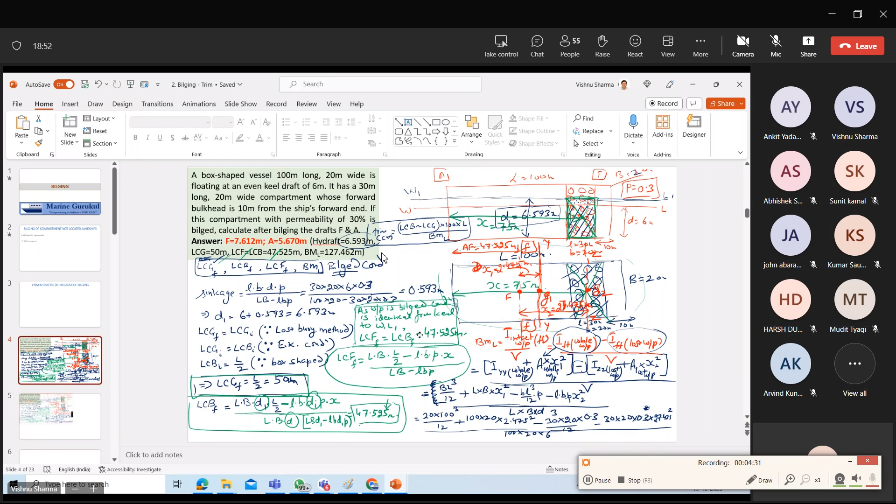It's running slow, so sluggish today. It's sluggish because I need to close this PPT, is it? Yeah, now it's come to me.

Okay guys, now yesterday we closed out on calculation of GM, that means the effect of bilging on the static stability of the vessel, that is the GM of the ship. Today we'll study how does it affect the trim and how do we calculate the drafts if required forward and aft.

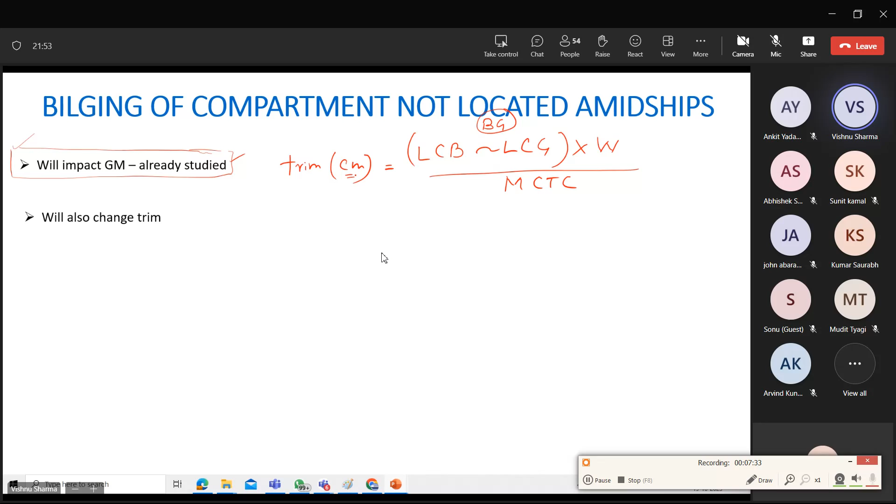We will simplify this formula so that we don't waste time in calculating MCTC. So let's have a look at the formula for MCTC. MCTC formula is W into GM longitudinal, GML, upon 100L. Okay.

Now, if we put the value of MCTC in this formula, it becomes then LCB difference LCG into W, and I put the formula for MCTC here, W into GML into 100L. What happens is W gets cancelled out and my trim in centimeters gets simplified to LCB difference LCG multiplied by 100 multiplied by the length of the vessel divided by GML.

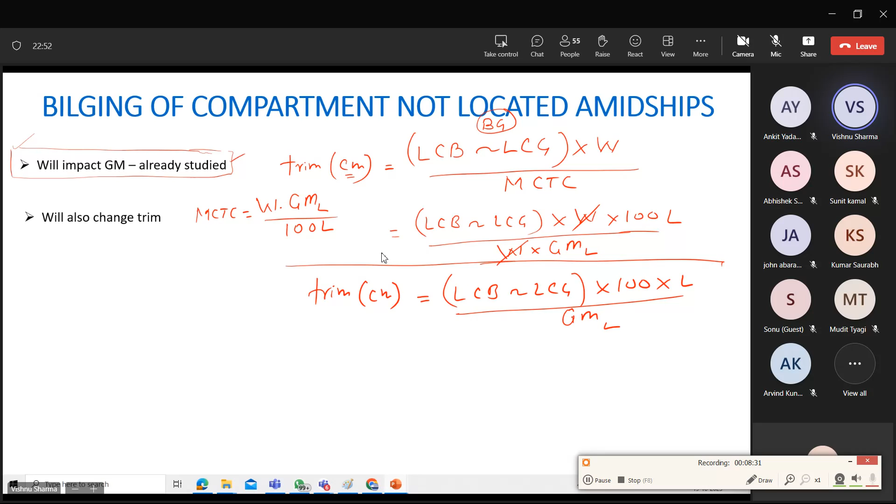This formula is same, only thing is it saves us few steps. We don't have to unnecessarily worry about the displacement, we don't have to worry about calculating MCTC. So we can cut short and use this formula. Do you agree with this formula on display, guys?

Trim in centimeters is equal to LCB minus LCG, multiplied by 100, multiplied by L, divided by GML. This is the formula we shall be using. Now, what is GML going to be equal to? GML will be equal to KML minus KG. There is no question of FSC in the longitudinal direction.

FSC is for the transverse direction, right? What is KML equal to? We already know GML equals KB plus BML, minus KG. That means what I must know to get GML is KG.

Now, if the question gives you the KG of the vessel, then yes, GML has to be used and should be used undoubtedly, because this is the correct formula. But again, many a times in our question, the KG is not given.

So if you see the GML formula here, to BML you are adding KB and subtracting KG. Usually for a normal ship-shaped vessel, BML is quite large, about 125 to 140% of the length of the vessel. So for a 100 meter long ship, the BML can be to the tune of 120, 130, 140 meters. Unlike BMT, which is usually 7, 8, 9, 10 meters. Compared to that, BML is relatively large.

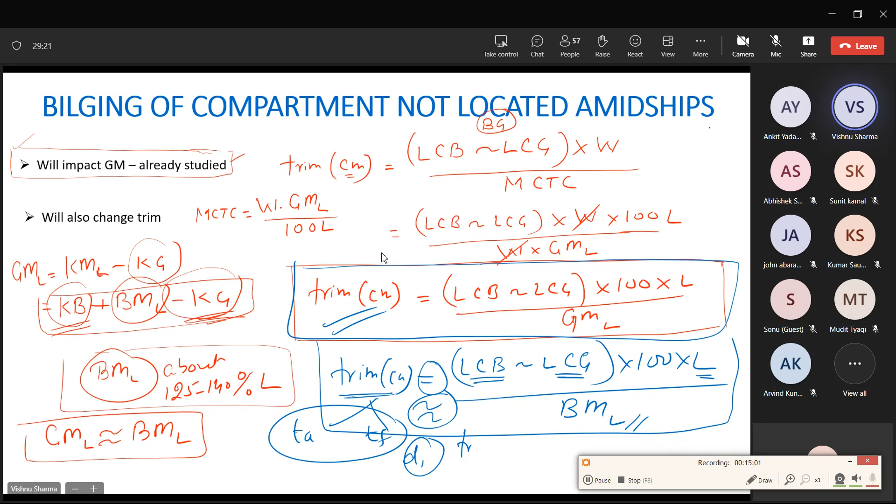So to summarize, for solving these questions, I need D1, I need LCB in the bilge condition, I need LCG in the bilge condition, I need BML in the bilge condition, and I need LCF in the bilge condition. If I can get these 5 things, I'm done with the question. Then there is nothing left to be attended to.

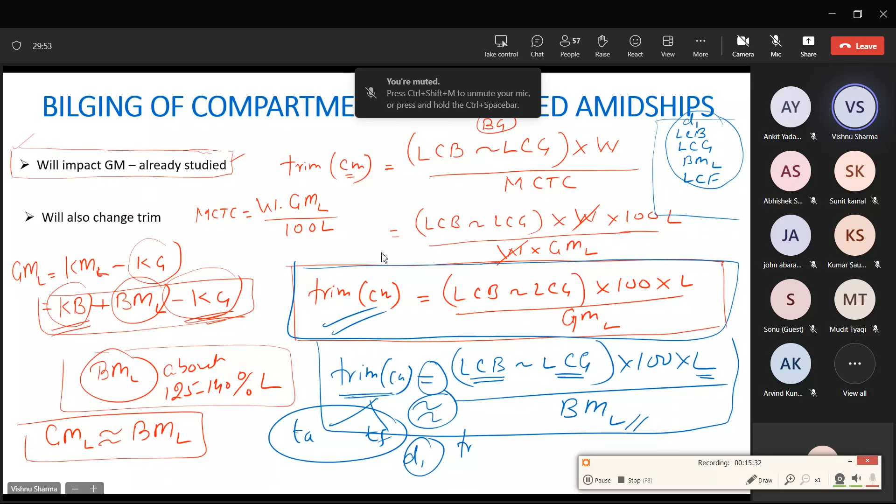So in the question that follows, our focus shall be on these 5 things. How do we calculate them? I list them here for your information once again.

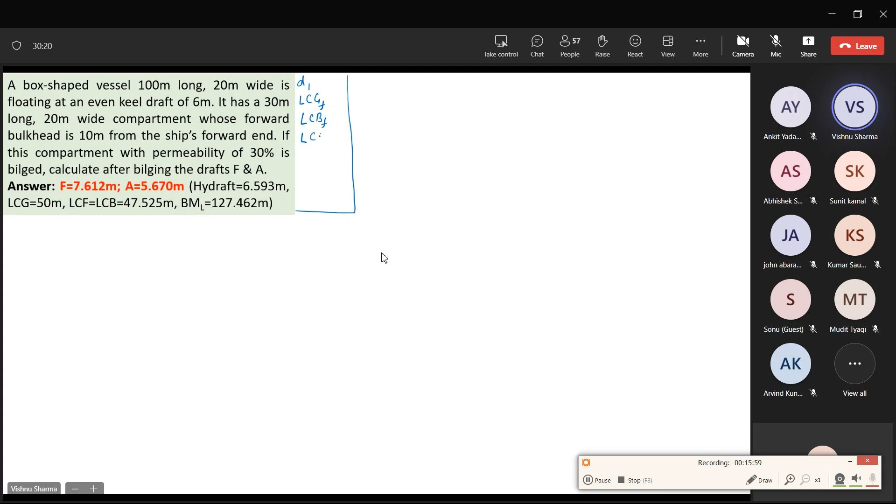We said we will have to calculate, after bilging, D1. We'll have to calculate LCG final. We'll have to calculate LCB final. We'll have to calculate LCF final. And once center of flotation is found, we can find the BML after bilging. These are all post-bilging values.

And once they are found post-bilging, I can close out the question without any problem. Do you agree, guys? Yes, sir. Okay, so what do I do?

First, I make the diagram, which we have mastered over the last 2 days. The length of the vessel is 100 meters, our standard ship. Breadth is 20 meters. Floating on an even keel draft of 6 meters, WL 6 meters.

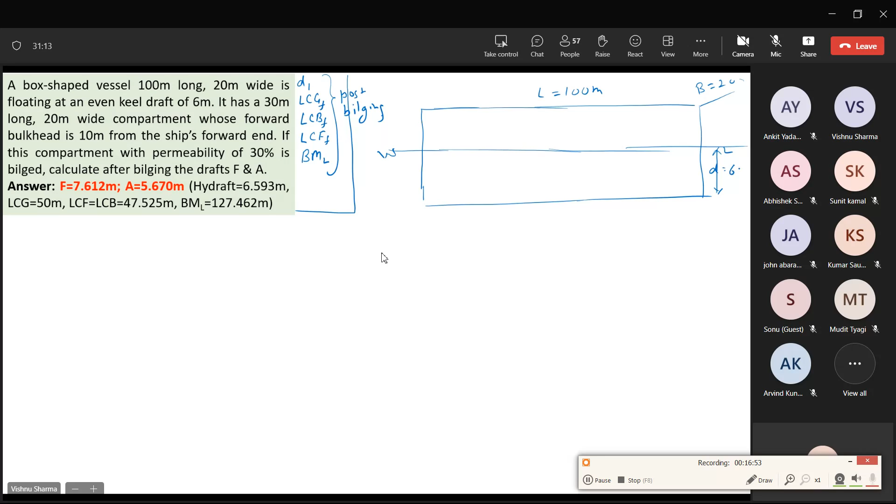It has a 30-meter long, 20-meter wide compartment whose forward bulkhead is 10 meters from the ship's forward end. So let's say this is the ship's forward end, this is the after end. The compartment's forward bulkhead is here, at 10 meters from the forward end. The length of the compartment is 30 meters, breadth of the compartment is 20 meters. It does not have any double bottom.

It has cargo of permeability 30%. KG of the vessel is not given in the question. You can see the question again. He wants us to find out the drafts forward and aft after bilging.

Guys, first please see, is this diagram in the side elevation made as per the question, yes or no? Yes. Okay, only thing is this compartment used to be midship. It has been now taken to the location given in the question. When this compartment gets bilged, I shade the lost buoyancy.

The lost buoyancy is up to draft D. This will cause the vessel to sink. I agree the final water line will be, vessel is trimmed, but we are drawing a water line like yesterday for an even keel condition. That means for D1, W1, L1. And obviously then this draft, wherever I find space, I have marked it. So not necessarily that it has to be marked here.

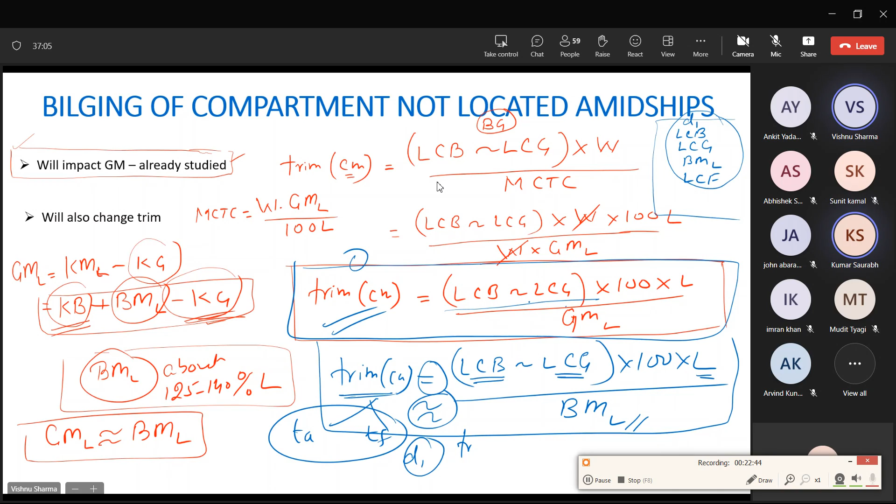You can go back to this formula also. If trim I put 0, then what happens? LCB difference LCG becomes 0. That means they are equal. Yes or no? Okay, but we don't have to waste time.

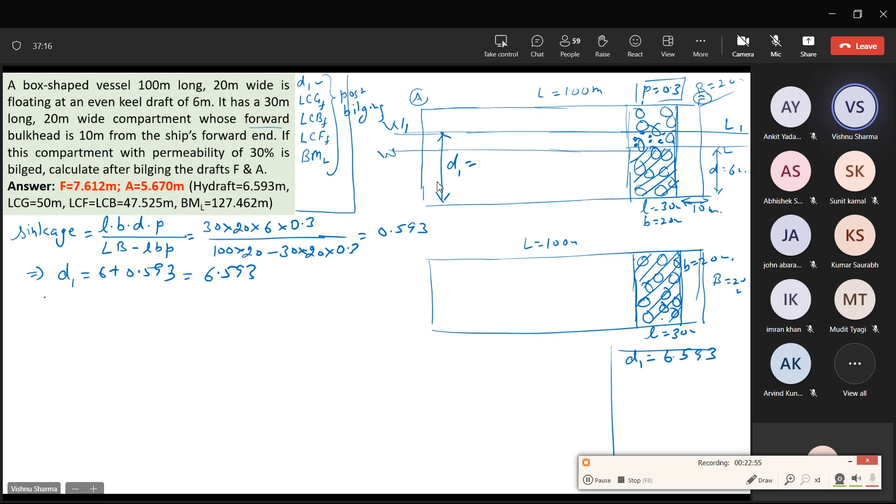In such a case, we can just put it like this. LCG initial, or let me just put it like this. Guys, what will be the relationship between LCG final and LCG initial, and why?

What we are solving, what will they be? Will LCG final be more? LCG final will be more because the weight is increased forward. Which method are you using? Lost buoyancy, it will remain same.

Are we using added weight method? No, sir. So then the G did not shift. If G does not shift, why will LCG change? LCG would not change, correct? Yes, sir. So LCG final will be LCG initial.

I am giving the reason here in my working: lost buoyancy method. Correct? LCG initial is equal to LCB initial. Why? Because vessel is on even keel.

I'm sure you agree with that also. And for this box-shaped vessel, what will be the LCB initial? Tell me, guys. Look at the initial condition, intact condition, what will be LCB? 50 meters, L by 2. Why? Because it's box shaped.

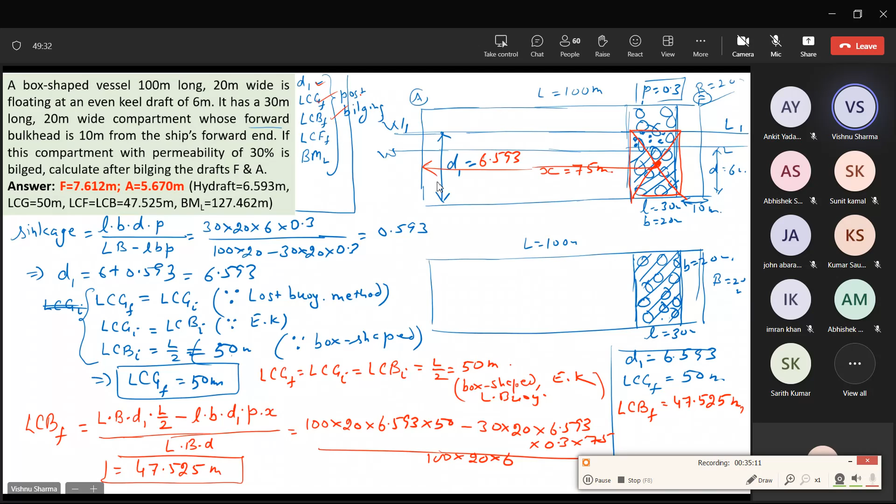Now, out of 5, 3 things are obtained: D1, LCG, and LCB, all in the final condition. All happy up to this point, guys?

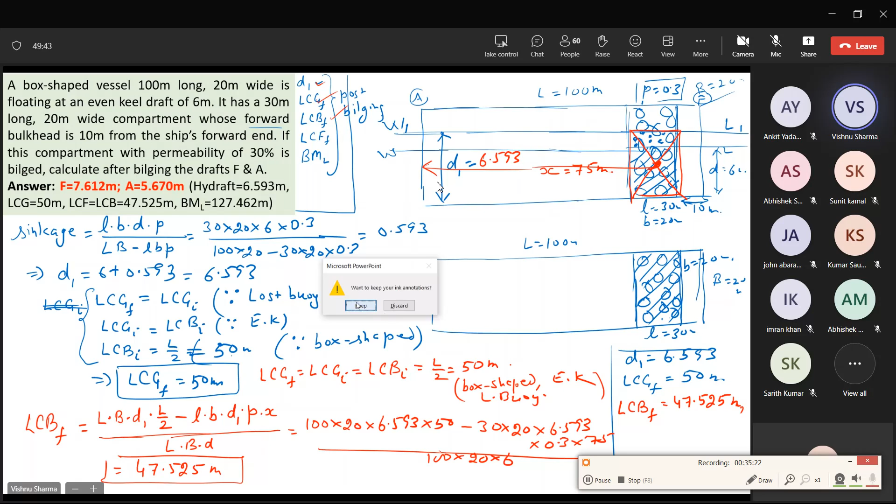Sir, yes. Okay, let me just go to the next sheet then. Here is the working so that you can correlate to the working on the screen itself rather than going left. Here are things.

Okay, now next is LCF. What is center of flotation? I told you earlier also, probably you will remember. It's the centroid of intact water plane. Am I right, guys? Yes or no? Yes, sir.

Now, in many questions like this one, your LCF final will come same as LCB final. But again, it is not universally going to be so. And hence, in some cases, you can get away by calculating either LCF or LCB and using the other as the same. In other cases, you may have to calculate both of them. So what we'll do is, though they are going to be same, I will still learn to calculate, like we did for KB also. In the first example, KB was D1 by 2, but we still learned how to calculate the KB.

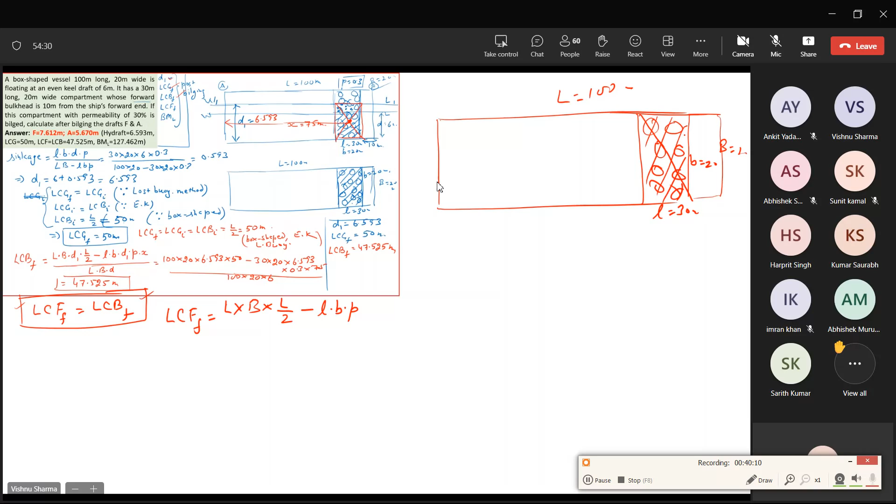Correct? And where will be the geometric center of this one? Here. And what is this, we have already marked? We have marked this as X. Yes or no? Yes, sir. This center will be here. This is 75. Yes or no? So this will be into x. This will be the moment about after perpendicular of the lost water plane.

And when I subtract one from the other, I'm left with the moment of intact water plane. I divide this with intact water plane. Intact water plane will be the whole water plane minus lost water plane. And if you put all these values, it will give you back 47.525. There may be a difference, instead of 5 you may get 6 in the last digit, or maybe 4 in the last digit, because of rounding issues, not anything else.

Why I'm saying they're same, just see that now. Let me change to green. Compare this expression with this expression. Compare these two expressions, this one and this one. You see what has happened? These are the same expressions.

Only thing is everywhere it is multiplied by d1. If we LBD d1 minus LBPD, that means all these terms are practically being multiplied by d1, and then it becomes volume. Correct? Or you can put the values and satisfy yourself: 100 into 20 into 50 minus 30 into 20 into 0.3 into 75 upon 100 into 20 minus 30 into 20 into 0.3.

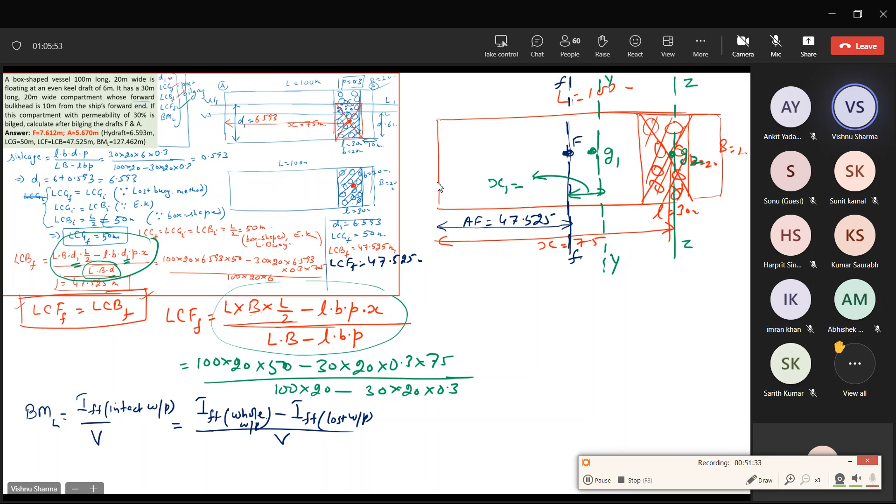Guys, what will be the value of x1? Everything is on the diagram. This is 50 meters, not 20, tell me now, what will be x1? 2.475 meters. Okay.

Likewise, for the theorem of parallel axis between FF and ZZ, I will need this distance, I can call it x2. Notations are important. Now tell me, what will x2 be equal to? It will be 75 minus 47.525. After perpendicular to ZZ is 75 meters, and we knock off AF from it. What is x2 going to be? 27.475.

Okay guys, draw your diagram like this, then only you'll be able to solve it better. Now, next step, I will use box brackets and apply the theorem of parallel axis.

Now you have to tell me, please feel free to respond. Apply the theorem of parallel axis for the whole water plane between YY and FF. What will it come to in notational form? Moment of inertia of the whole water plane about YY, plus, what else do I do to apply the theorem of parallel axis? B capital L cube by 12, plus area of the whole water plane into x1 square. Am I right, x1 square, guys?

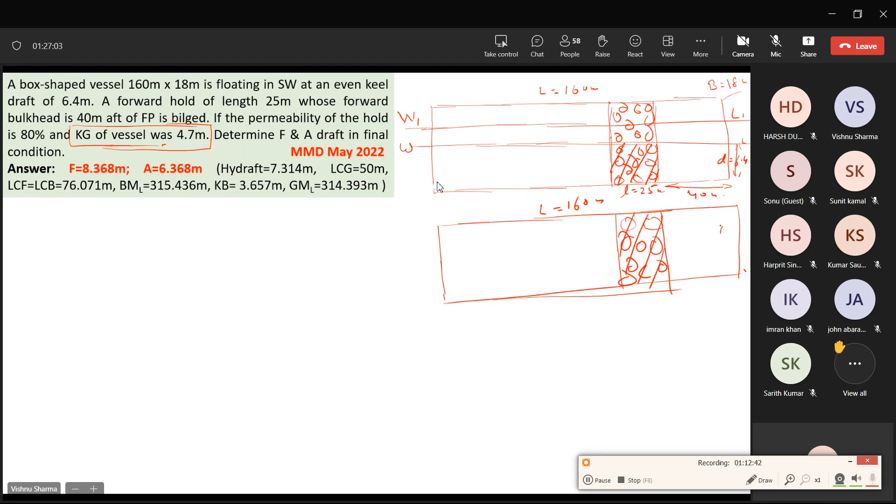The permeability is correct, sir - 0.8, okay, and permeability is 0.8 and KG is given.

Guys, what will be the breadth of the compartment? It's not given in the question, and why? What is the breadth - 18 meters, sir. Why 18 meters? I'm just asking, just want to be sure here.

Because it is a box shape vessel - no, why box-shaped vessels cannot be double hull or cannot be smaller in width? Yesterday in the box-shaped vessel we had the tanks, no - 6 meter, 13 meter, 6 meter, yes or no?

So since it's not specified - if it were mentioned like forward or port or starboard - but here they have general cargo mentioned. In a normal cargo ship, you are a single hull ship, holds extend from side to side, right? That's the better argument.

Okay. Intentionally, I had skipped writing breadth - I wanted to check with you why it should not happen, in case you get stuck. You've taken 18, that's fine, but it is because it's a dry cargo ship. Dry cargo ships are usually single hull ships, so they extend from side to side, so you can take that as 18 meters.

Good, okay. Has everybody got the sinkage or is there a problem? Yes, I got sir - okay, you have got it. How about others? Please write in the notational form, put the values and get the answer.

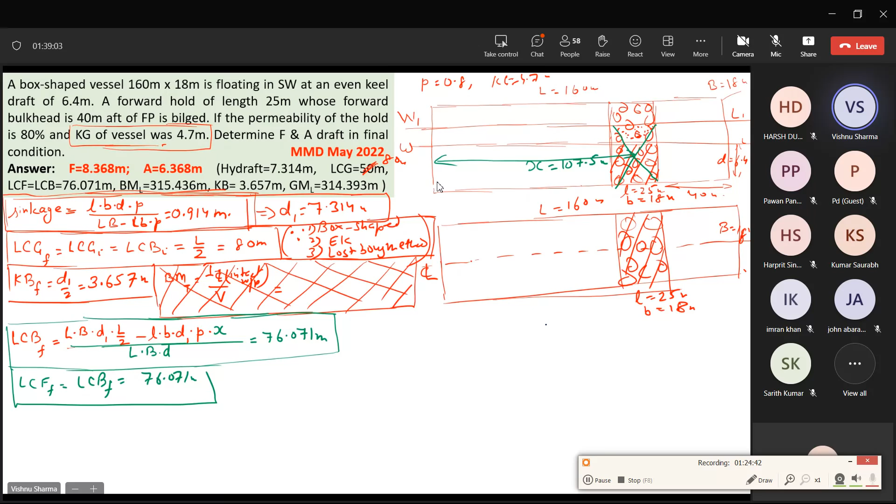Now what is left is BML. With LCF calculated, pay attention now - some of you may still need more reinforcement of this. Mark the center of flotation on the water plane. Center of flotation is somewhere here on the water plane.

With this distance, mark the distances now. This distance represents AF equal to 76.071 meters. Now I draw an athwartship axis through F and mark it as FF.

Now I write my formula for BML with reference to my diagram. BML will be equal to IFF of the intact water plane by volume of displacement, which in turn would be equal to IFF of the whole water plane minus IFF of the lost water plane, divided by V.

Now I'm asking myself a question. Is FF a standard axis for the whole water plane? Does it pass through the geometric center of the whole water plane? The answer is no.

Where is the geometric center of the whole water plane? It is somewhere here at G1, at a distance of 80 meters from aft, half the length.

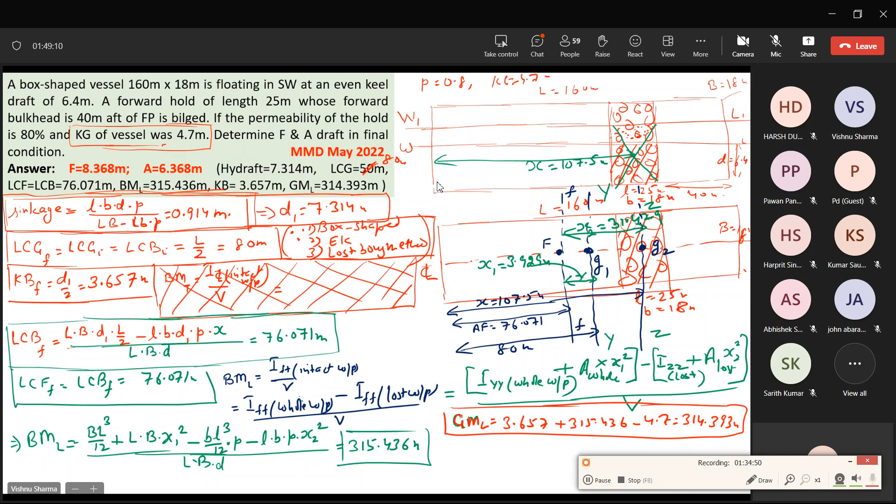Let me take to a blank sheet then. Do you agree, beta? Is that okay?

Okay, once GML is obtained, my trim formula is: trim in centimeters, of course you can put in meters, whatever to you, equals LCB difference. What is LCB final? 76. LCG is 80. So 80 difference, 76.071, this is how you can write it. Multiplied by 100. Multiplied by the length of the vessel, 160. Divided by GML.

314.393. This comes to final trim, you can see 368, 2 meters, is it? Does it cause a change by trim by 2 meters? So it seems to be 200 centimeters, that is 2 meters by head. Am I right guys? Just check. Yes sir, it is 2 meters.

I got it from the draft, I picked up from the answer in the draft here. So TA will be equal to trim, 2 meters into 76.0. Now I'm closing the final step, which I didn't do in the last one. Upon the length 160. This is TA.

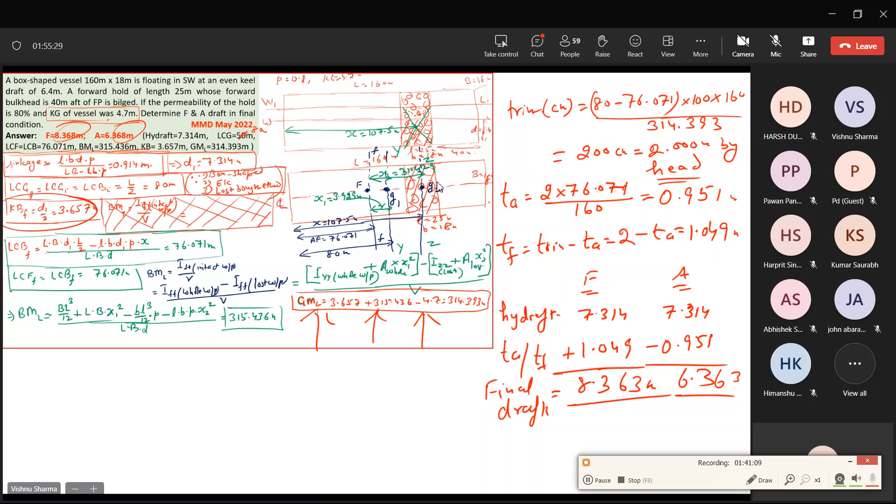Okay, we go to the next one and see what it is.

I don't want to complete everything today. Guys, the next question which we are going to do is... okay, tomorrow how many more questions? One, two, three questions more, and we'll be through with the

liquid. Okay guys, this question is unfortunately an MMD question picked up from Dubey's book. And Captain Dubey's book has, unfortunately, not only answer problems, it has a severe language issue also. Okay.

A box-shaped vessel, one, and why I've taken this up is because there is a problem with this question, and it's a MMD question. God forbid if it gets repeated, then you will be unnecessarily caught on the wrong foot. That's why I'm taking it up. Otherwise, such questions should not even be discussed. They're controversial questions. A box-shaped vessel 190 by 25 is floating at even keel draft of 8 meters.

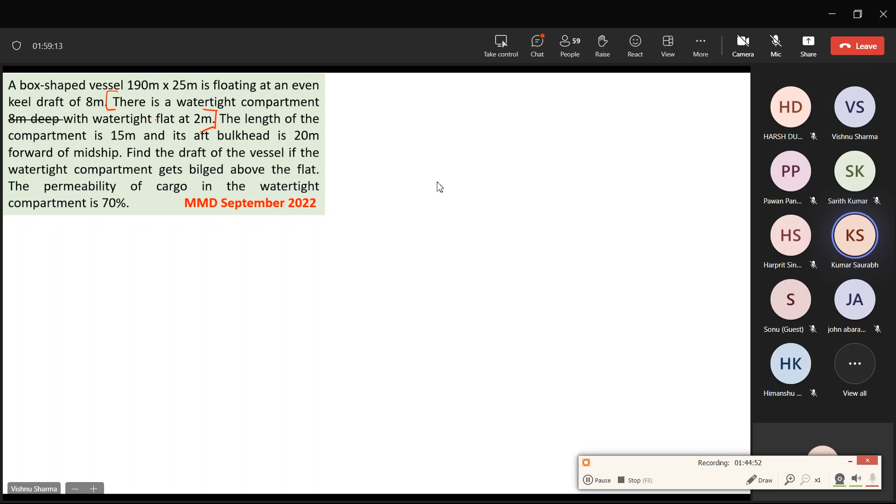That is why, as per Captain Dubey's solution, this word should not be there in the question. But in MMD it has also come verbatim. Somebody has picked it up from the book. I'm sure if somebody cannot read the question and correct it, he would not have corrected the solution either, so the solution also would have come from the book only.

So guys, if this question repeats again, just in your own mind, disregard this word. I'm not telling you to disregard it because that's what the question means, but only to align it with the solution given in the book. That's all. Am I clear, beta? Am I clear, guys? Yes, sir.

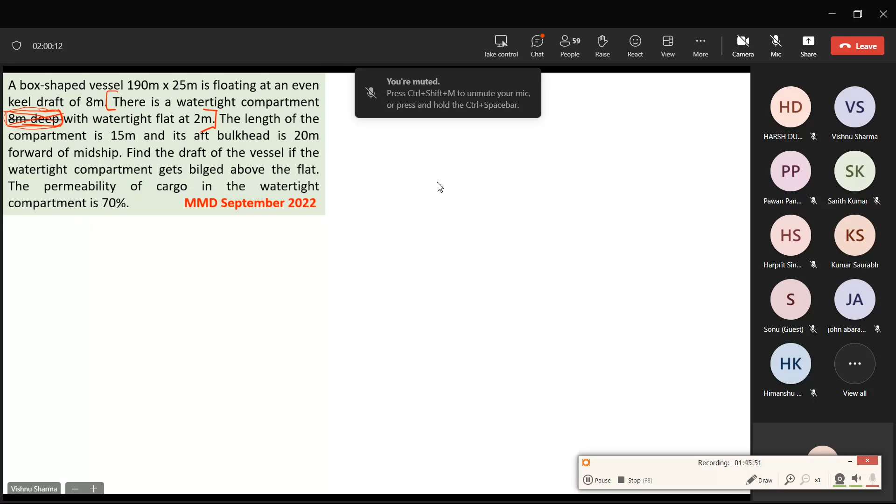So basically, as per Captain Dubey's book solution, the question is like this: length 190 meters, breadth 25 meters, even keel draft of 8 meters. There is a watertight compartment.

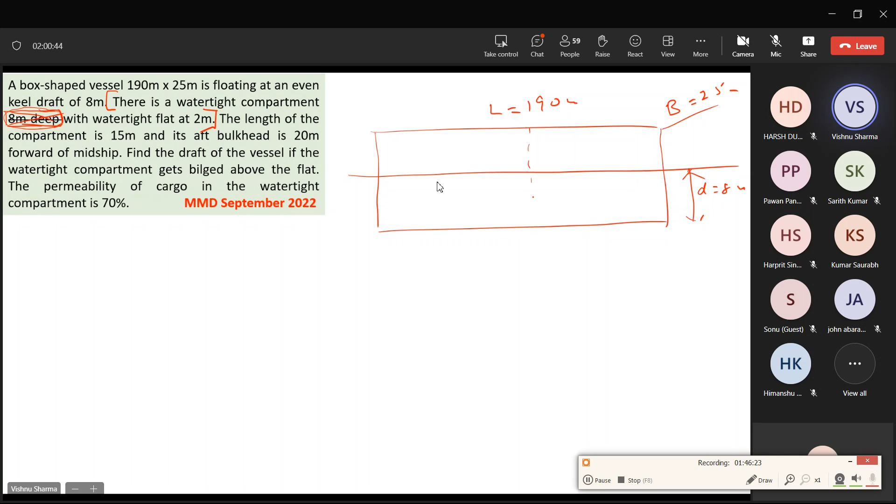The length of the compartment is 15 meters and its after bulkhead is 20 meters forward of midship. So here is your midship, and 20 meters forward of midship is the aft bulkhead. So this distance is 20 meters.

So that means this entire distance from here to here will become half the length, 95 plus 20, which is 115 meters.

This aft bulkhead distance I'm talking about, this one, right? Half of 190 will be how much? 95, sir. Okay, 115, you're right.

And then the length of the compartment is 15 meters. So the compartment is like this here: L is 15 meters, breadth is not given, so breadth is end to end, 25 meters.

And it has a permeability. Firstly, it has a double bottom of height 2 meters, and then it has cargo above the double bottom - obviously it can't be in the DB, so that's where the cargo is. Permeability is 0.7.

You have to find the drafts. This is how the question has been solved. Can you all solve this question, guys? Yes, sir. Okay, now let's solve it in the class.

What's the time? Because this is the last question - maybe 11:30. Let's take this question, no, what's the hurry. Can you please, all of you, make the water plane area diagram here.

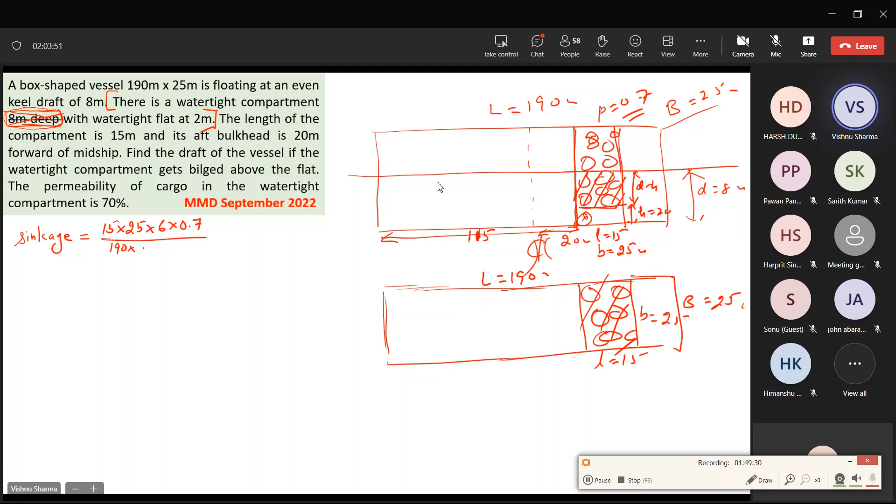D minus H, 6 meters, into permeability 0.7. 190, 25 minus...

Guys, please do it independently. Don't copy from the board. And if you're not, because we should be able to figure out if there are any concerns.

Sinkage is 0.351, guys. Am I right? Yes. Okay.

I'll calculate LCF, that will be faster for me to calculate. Y multiply by D. Okay. In this case, now guys, a word of caution - will LCF and LCB be the same? Look at the diagram and tell me.

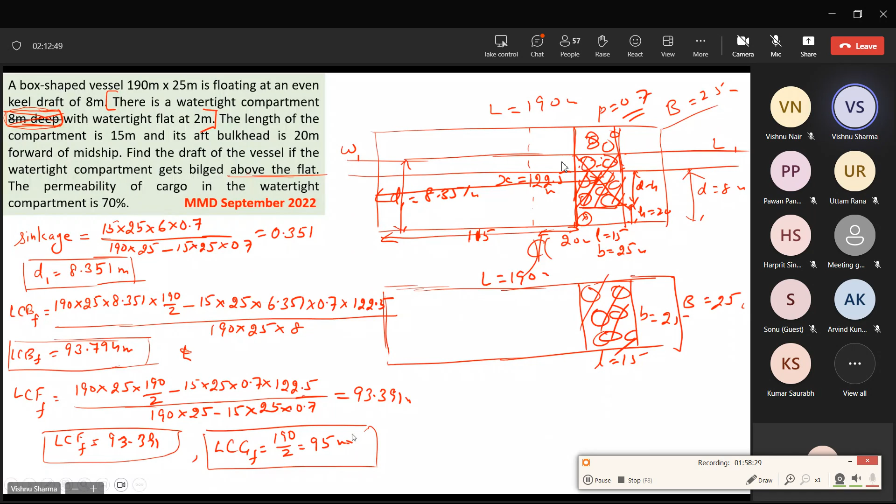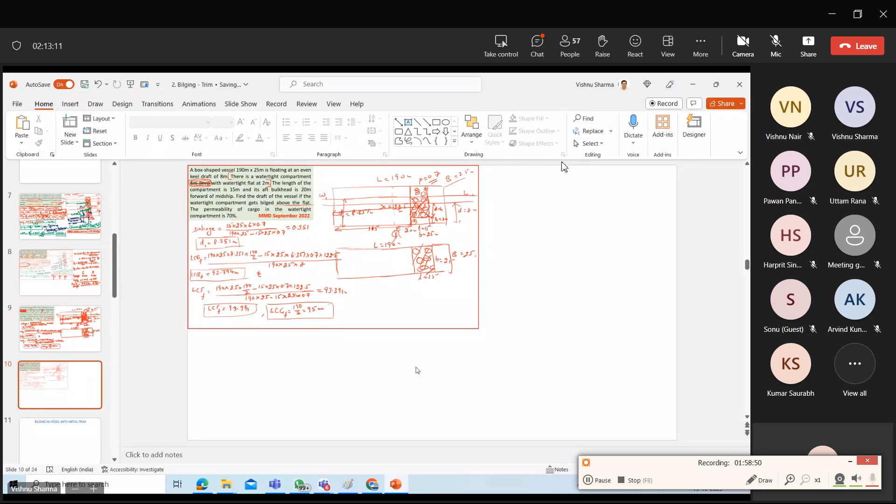Now I'll take it on the next screen. Anybody who's struggling and not getting these, please let me know. If anybody is struggling, please let me know.

I'll go to the water plane area with blue marker now. FF. This distance is 93.391. Geometric center, water, this one is, let's say, YY. This is X1. This is O.

One, 1.609. Now we are good to get.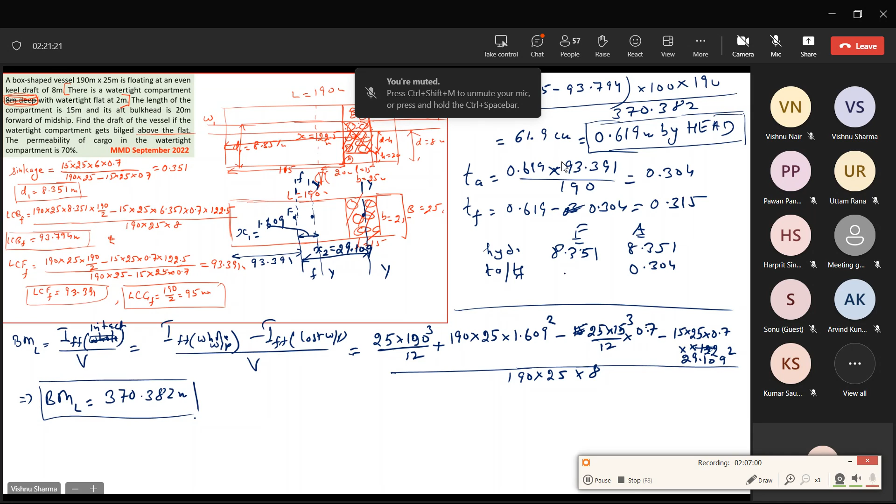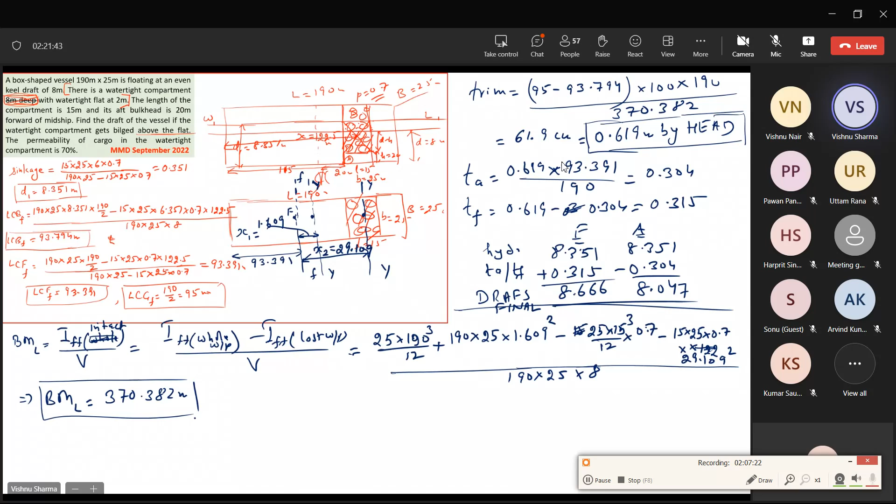Guys, 8.666 and 8.047. Yes, sir, correct, sir. Yes, those are the answers. So those of you who have got it, you can assume that you are reasonably in control with the bilging part. Here is the calculation of the final drafts.

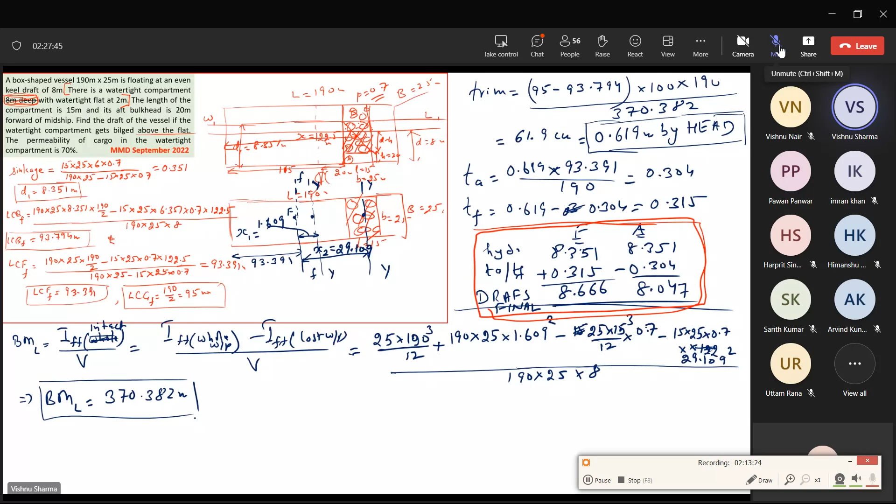Answers are not there in that, sir. So take this from the book, Captain Subramaniam's book, take the intermediate compartment exercise. Don't take the end compartment because compartment can be anywhere. So whether end or not end, you take in Captain Subramaniam's book, there will be an exercise on bilging of intermediate compartments. Okay, beta?

That has the answers, and those answers are reasonably correct, all of them. So that's a good book to fall back upon.

These are the questions. We have done 4 of them, and another 2 we'll do tomorrow. So beta, the questions in my list, they are already discussed with you, no? The last 2 we are going to take tomorrow.

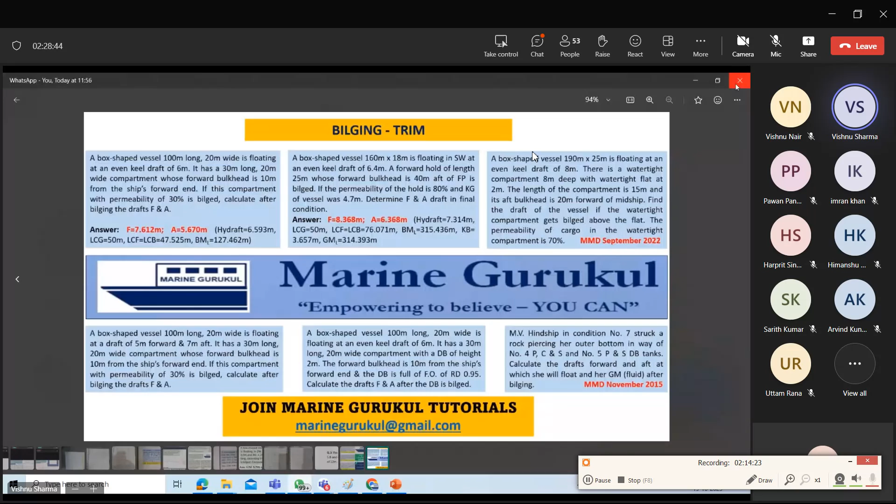This MV Hindship question is here. These questions we have already discussed, right? This one I have already told you, Captain Dubey's book problem we have seen. So I've already sent you what I have pulled out. Rest you can pull out, take Captain Subramaniam's book.

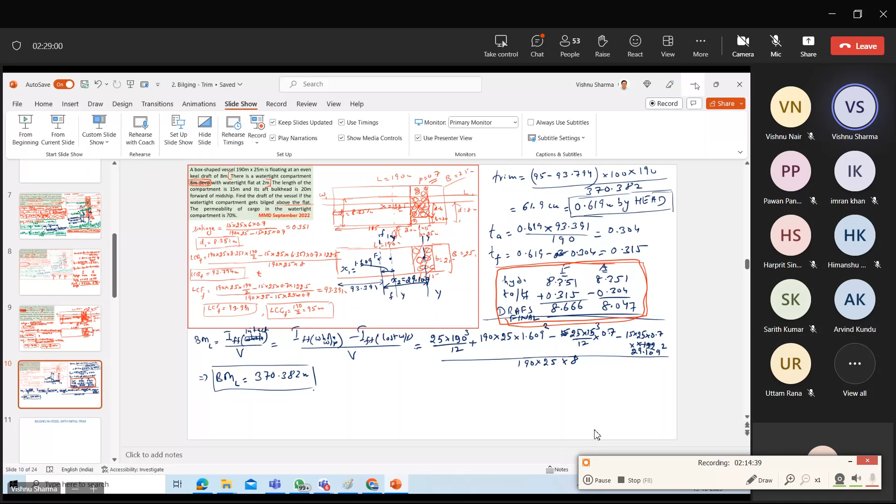Who has got Subramaniam sir's book, beta, in which bilging is there? Somebody has in the group? Yes sir. So there is an exercise named bilging of intermediate compartments. Can you take a photo of that with answers and post on the group? Anybody wants, you can do any question from there.